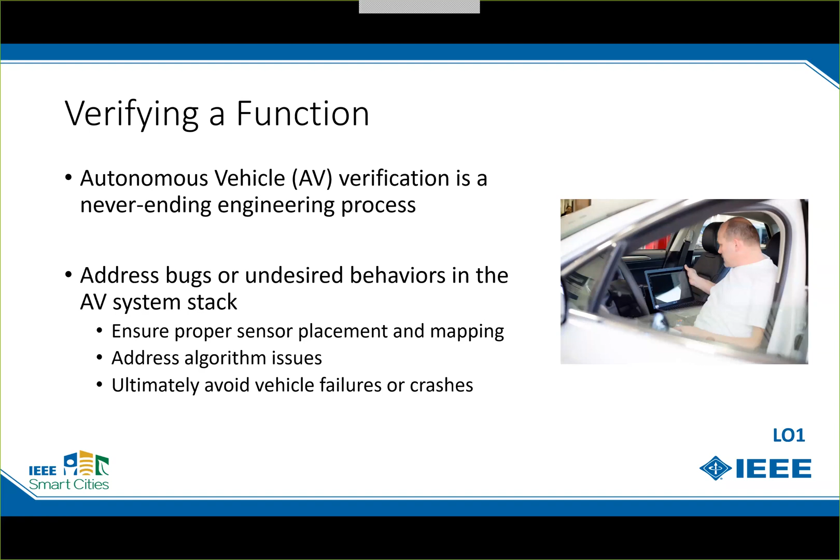And that's where simulation tools are so incredibly valuable, because it allows you, particularly if you're using any kind of modern software development processes, the term you'll sometimes hear is DevOps, it allows you to automate much of this regression testing. And in fact, you can automate a lot of the simulation testing required as you're developing code. Just another example to give you the kind of complexity that I'm talking about.

Let's think about this notion of what is known as a behavioral competency. So NHTSA, actually a group known as California PATH, doing some work for NHTSA, has identified 28 behavioral competencies. And then Waymo and some other folks have come up with an additional 19. So currently, roughly we have 47 of these things.

An example of a behavioral competency is the ability to do a high-speed merge. The autonomous vehicle can do a high-speed merge onto a freeway. That's something that any self-driving car has to be able to perform competently. If you think about that test case, so merging onto a freeway, and you assume that there might be, in my example, 8 relevant variables.

These variables could be things like traffic density on the expressway, traffic speeds, the color of vehicles, weather, things like that. And for each of those different variables, if you can imagine 5 possible values, simple math will show you that just with those, and I would suggest these are very conservative estimates, that'll give you 400,000 unique test cases to prove out this one competency.

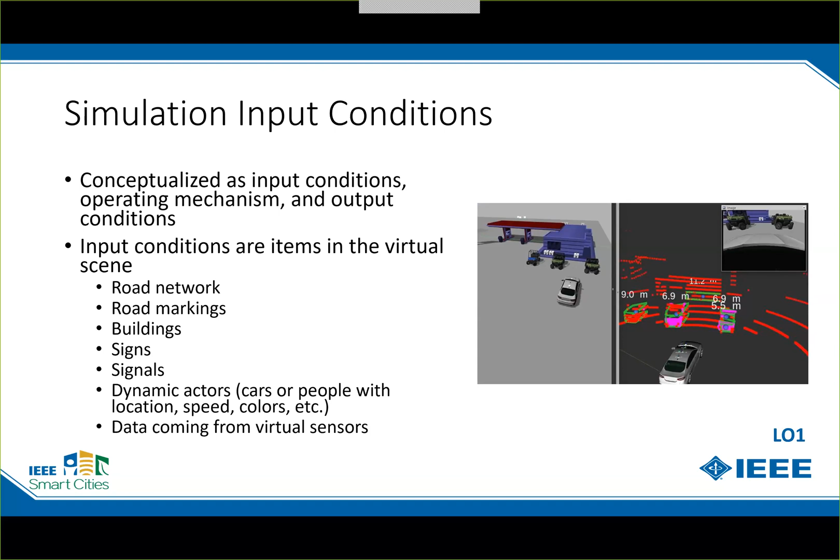I touched on this a bit, but input conditions for a simulation. These would be things like the physical road network, road markings, buildings, signs, all of those attributes that make up the scene. And I'm going to run a little movie to show you what's currently available in terms of simulating input conditions with one of the virtual testing tools that are out there.

So as you can see, you can vary the quality of road markings, whether the roads are wet or dry, traffic, types of vehicles, lighting, the color of vehicles, time of day, etc. This particular example that I'm showing you uses the Unity rendering engine, which is one of the two large gaming engines that are out there. But it's getting better as we continue on. It's getting more and more photorealistic in the ability to actually turn out a simulation that looks like the real world.

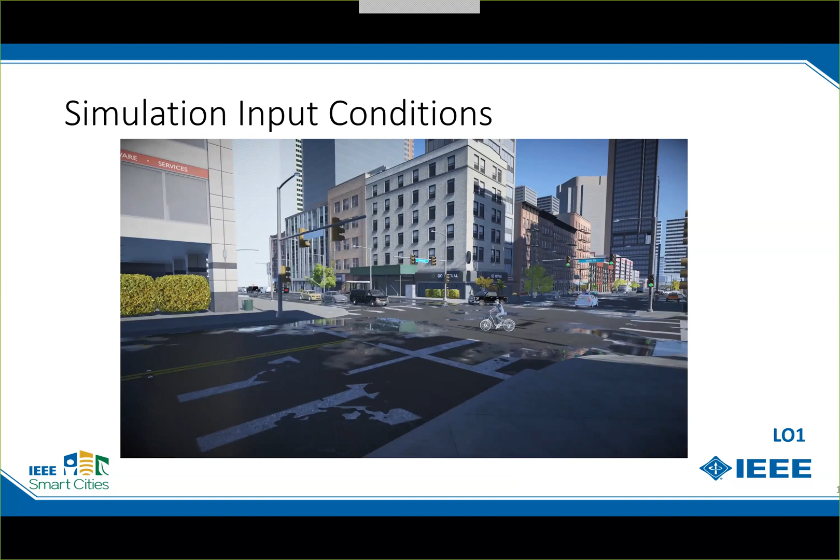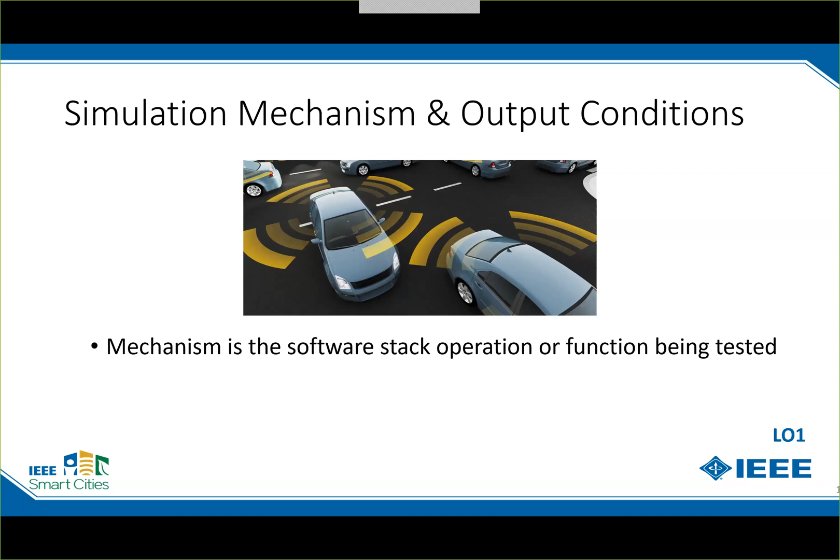Second thing that we want to look at in terms of simulation is the mechanism. This is the actual function or AV feature or piece of software that we're testing. And to give you an idea of the complexity of an autonomous vehicle software stack, this is a graphic that shows the Apollo 3.0 AV stack. Apollo is a product that originally came out of Baidu.

So this is an open source piece of software, and each of these small blue boxes that you see under the open software platform. So you'll see there's a piece that says localization, perception, planning, control. So, as an example, let's look at the perception box.

It looks like a very small piece of the overall stack, but that box by itself is all of the code required to take input from cameras or radar or LiDAR and convert that raw data into meaningful data in a manner analogous to, in the case of a camera, your eyesight. So it's taking image frames from the scene, fed to it by the camera, and it's actually deriving useful information from that scene. It's identifying cars and people and other objects in the scene as part of that perception function.

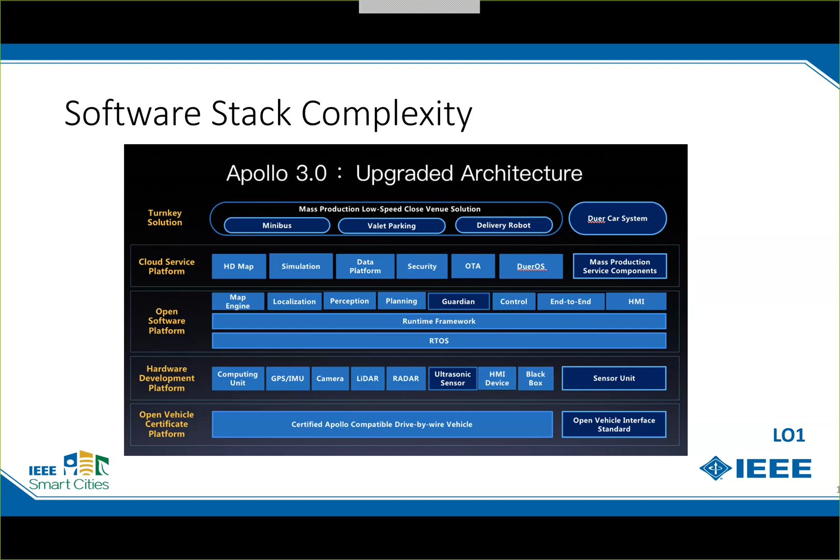So this is not a trivial piece of code, and it is not a trivial task to try to test this going forward. And the last piece of the simulation is we need to be able to simulate output conditions. By output conditions, I'm referring to control of the vehicle's longitudinal and lateral motion. So throttle, brake, steer, shift. We need to somehow, as we're running the simulation and we've made a control decision, send an output to our virtual vehicle to command it to turn left or turn right.

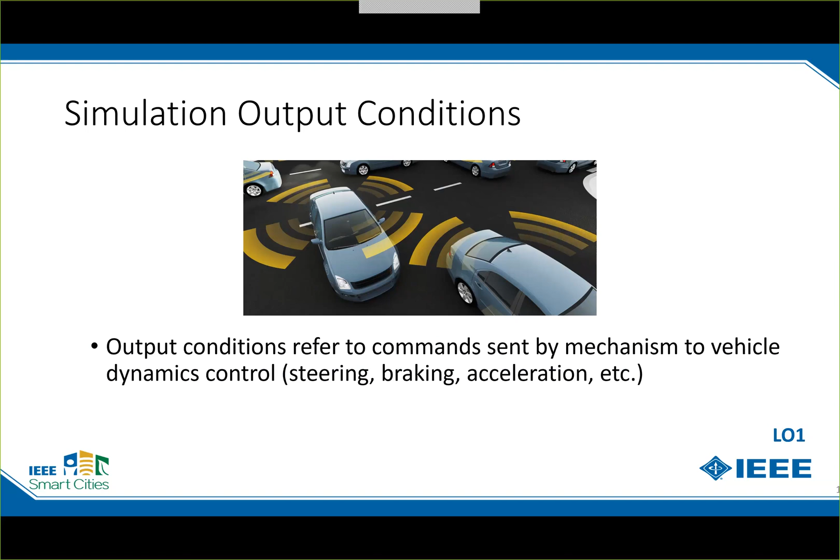Give you an example of that. This is a lane keep assist example. So this little movie that you're going to see uses a camera. It is perceiving the scene in front of it, and it's passing image frames at about 20 hertz, 20 times a second, to the perception stack. The perception stack is then identifying where are the lane markings in the image. Once it identifies the lane markings, some additional code compares the location of the lane markings to the current position of the vehicle.

And then in order to keep the vehicle centered in the lane, as it sees movement in the left or right direction, commands are sent to steer the vehicle left or right. So let me run this. You can see how this operates. So it's looking at the incoming data, and as we enter the curve, you'll see it will begin to command, in this case, a right steering angle at some degree to keep the car centered in the lane.

So even though it looks relatively simple, there's a lot going on in the background. And in order for this to actually work in a real car in the real world, all of those pieces that I mentioned, the input conditions and the output conditions, all of those have to have very good correspondence with how the real physical world operates.

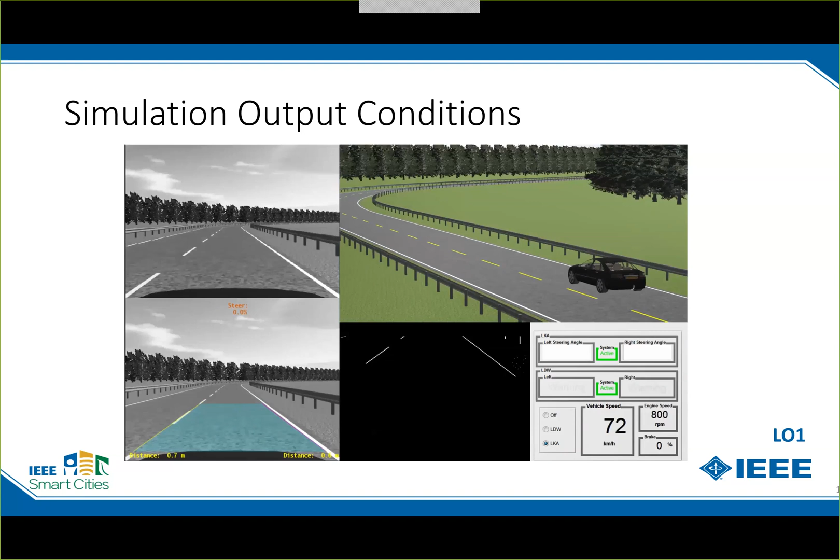So one other thing that I want to touch on with respect to simulation and why it's useful and why we want to use it is if you think about behavioral competencies and the many millions of tests that you need to run, that is a very expensive proposition. Simulation would hopefully allow us to narrow down the funnel of the actual physical tests that we need to run. And it will allow us to do lots of testing in a very short period of time compared with running actual physical tests.

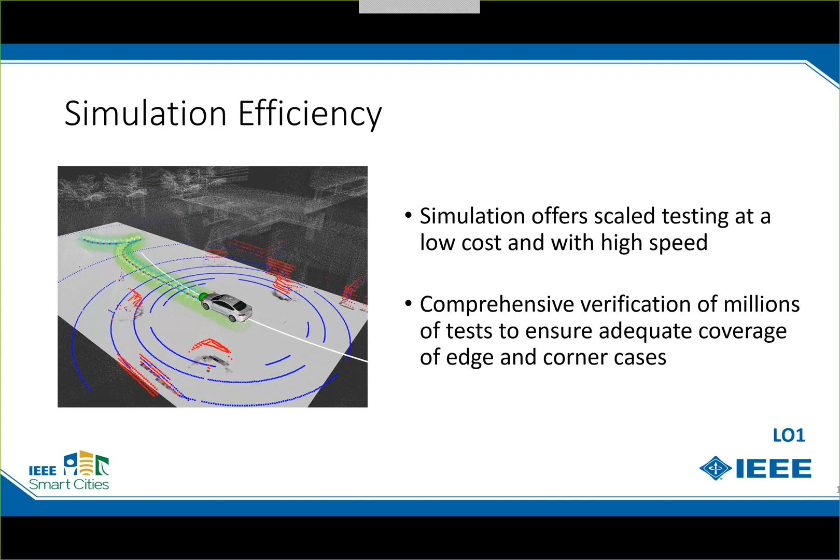Let me now show you an example of sort of how this works, and then I want to talk about two approaches to simulation. One is a workstation-based approach, and one is cloud-based. So this is a workstation-based example. In this example, again, the perception stack is attempting to determine is there something in front of us? Do we need to apply the brakes? You'll see in the upper left a graphic representing a simulated radar, and then on the right-hand top is the image frames coming in.

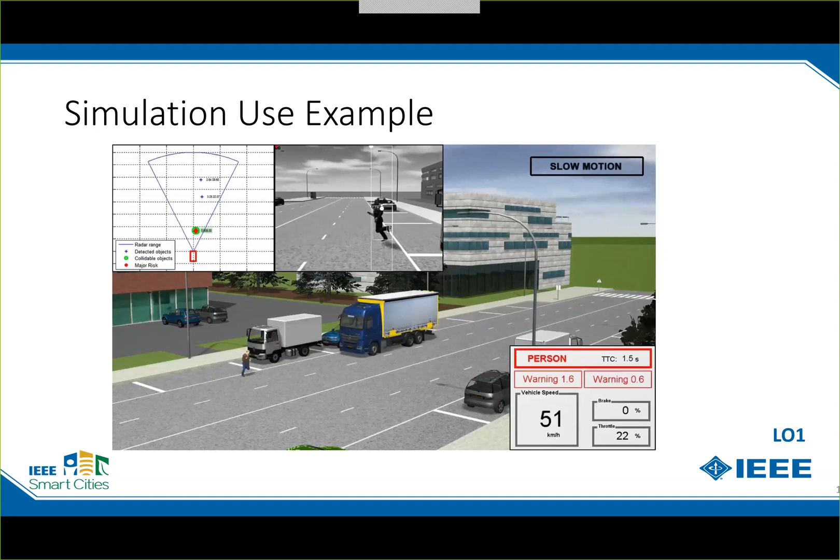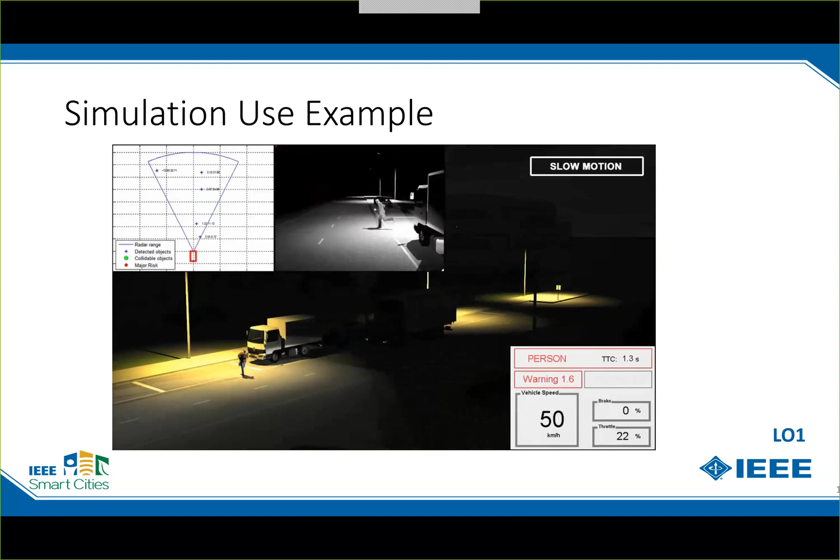And as I run this, the gentleman's running out in front of the oncoming truck. We perceive that he's there. We try to apply the brakes. In this case, it appears we may have hit our virtual individual, but the idea is to slow down and ideally not hit the person. Same situation, there's lighting above where the person emerges into the lane. In this instance, we've eliminated the lighting, so we've changed one of the variables.

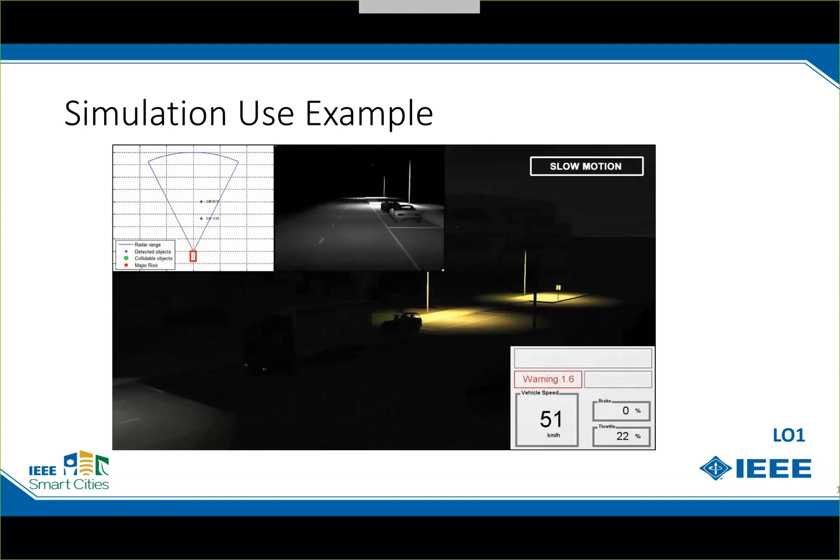And you'll notice in a workstation-based approach, these all run serially. So we run test 1, then test 2, then test 3, then test 4, changing different variables from run to run. So here's rain, fog, snow, etc. So this is an example of how, in this particular instance, you're checking your perception stack and your controls in this one given scene, and you want to run all these different variations.

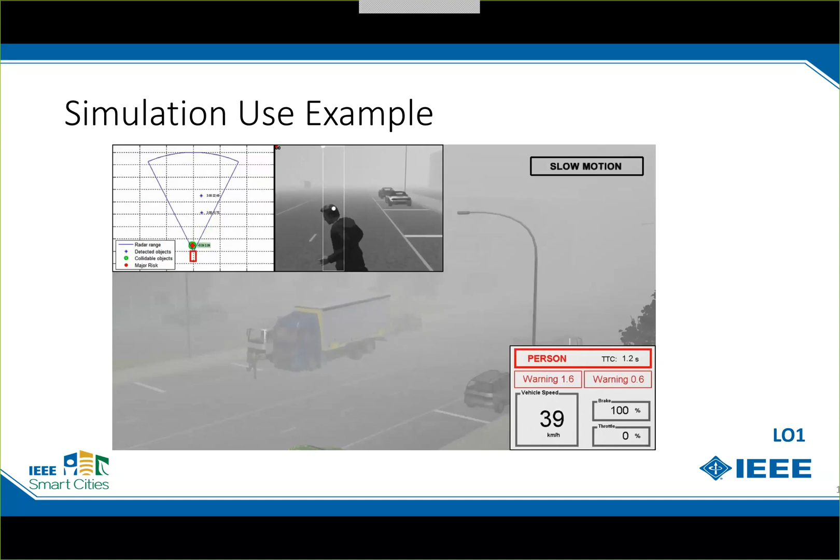And as I said, you can do this if it's a workstation-based simulation tool. You're going to do this serially. If it's a cloud-based tool, each of these different tests that you've seen can all be queued up and can be run simultaneously. So if you've seen anything about Waymo and their CarCraft tool and how they're doing simulation testing, this is what folks like Waymo are doing.

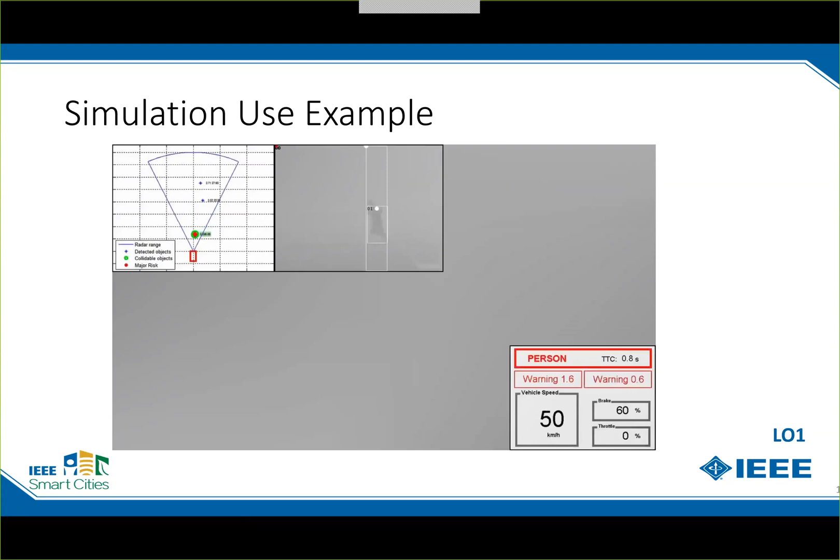They're running millions of test instances overnight, and they're doing that on a continuing, ongoing basis over and over. This gives them tremendous ability to cover many edge cases, many combinations, and they can begin attacking that problem of, for instance, if we use behavioral competencies, the 400 million tests that we need to run. So that gives you an idea of why simulation is so extremely valuable.

But now I want to touch on some limitations when it comes to using simulation. The thing that you have to consider here is that simulation is only useful if you have what I'll term good correspondence with the real world. So essentially what we're saying is the mathematical models that are used to model the sensors must in fact behave in a manner similar to the way the real sensors work in the real world.

The virtual scene that's been built, the material properties, the specular versus matte surfaces, whether something is metal or plastic or paper. All of that information has to be incorporated into the simulation to ensure that we're not running a simulation that is essentially useless because it doesn't reflect the real results we're going to get when we go and run the vehicle in the real world. Let me touch particularly on sensor models.

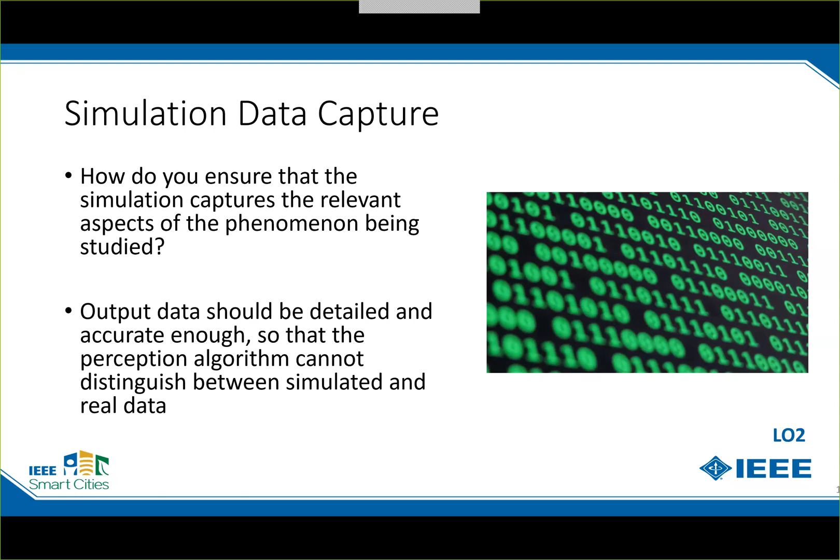So as I mentioned, I'm a founder of one of the simulation companies. And the difficulty that all of the simulation companies have is that they're relying usually on published research coming out of the universities in terms of guidance in how to build the sensor model. Their expertise typically is in graphics and 3D modeling capabilities. They don't usually have access to physical laboratories or test vehicles. And in many cases, they don't even have the actual sensors themselves.

And this can result in models being built that, since they don't have good correspondence with the way the actual sensor works in the real world, can give you false or misleading results when the simulations are run. Sensor models typically are built in 3 forms. So the first would be what I call a non-realistic perfect model. So if this is a radar, essentially what this perfect model will tell you is that there is a target in front of the vehicle at some range or some distance from the vehicle.

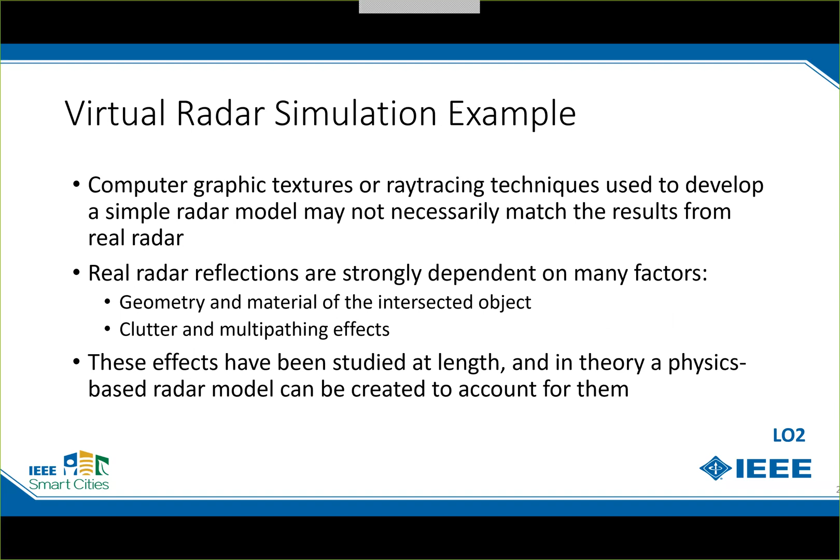Give you an example. If we're modeling a radar and we have this situation, the pedestrian that you see in front of the vehicle, typically you don't get much return in the real world from a real radar. You wouldn't know that a person is standing there. But we understand that, and even with simple models, this is relatively easy to model. If we make it a bit more complex, so we have another vehicle in front of that person, then you'll see the white van, but you will see, again, the person in between the 2 cars.

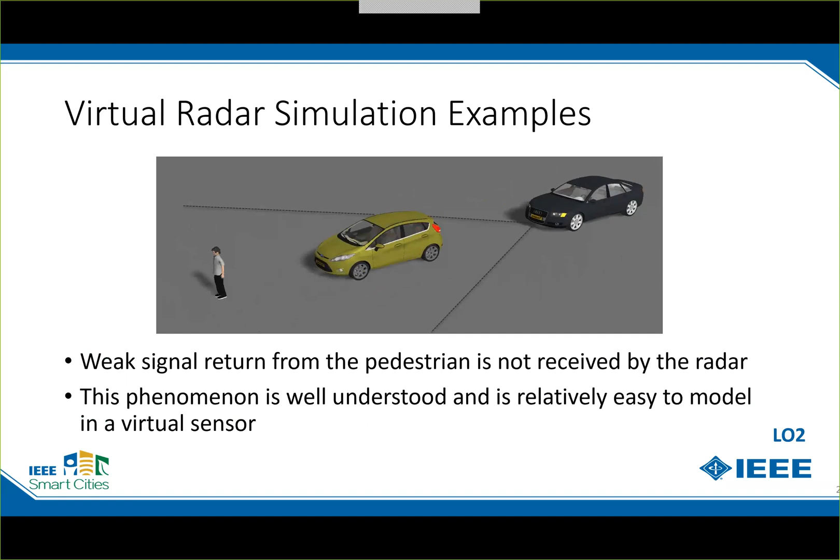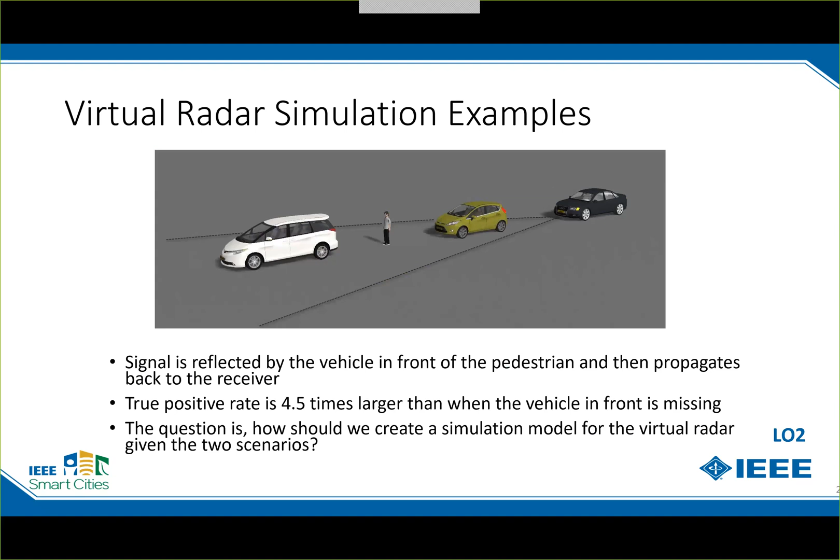The question becomes, how do we model this relatively straightforward, simple condition, as well as this more complicated condition in a virtual radar given these two different scenarios? And that's the challenge that the simulation companies are facing. Like I said, the way this is generally approached in the better quality models is to use what's known as a probabilistic sensor model. This is how that works.

So in this case, you'll see on the top two cars that are converging on each other. And the blue sort of cone, that's the radar beam of the car looking at the car approaching it. As I start this, the top left black box that you see, that's charting the actual range between those two vehicles. And I apologize that the legends are really too small to see, but it's in meters.

The bottom chart that you see with all the different colors, that's the actual range, and on top of it is superimposed this probabilistic noise model. So the bottom is what we would pass to the perception algorithm, and we would force it to process that data to derive a correct range. And then on the right, you'll see these little circles. Those represent clutter. So that's the noise that the radar is picking up as the simulation runs. This is currently, for simulation sensor modeling, pretty much state of the art.

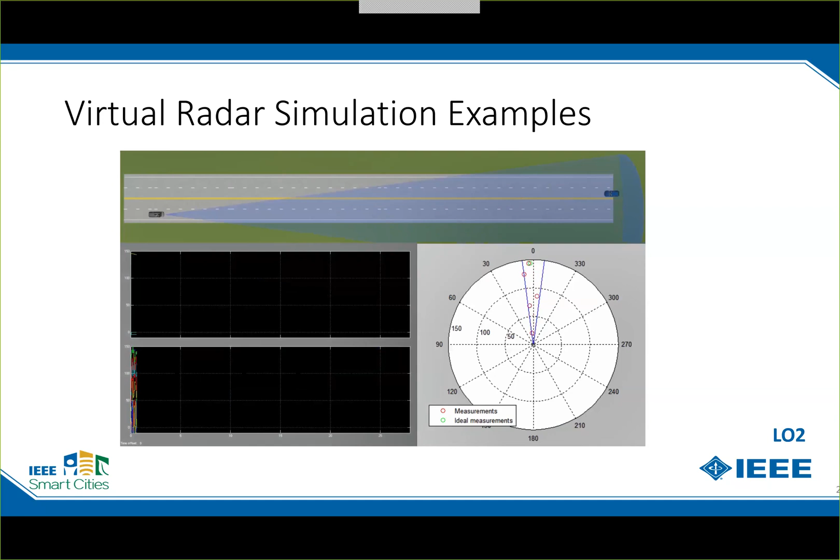I'll show you one other example that's a bit more complicated. This is again a radar example, and this is showing you what's known as range Doppler output data. So this is taking a simulated raw radar data model and processing it, and what you see on the right-hand side is what a radar engineer would expect to see in terms of processed data. So as I run this, you see the scene in front of us, and on the right-hand side, you have to imagine we're looking down on top of our car. And you'll notice the speed, there's a line at 15 meters a second. That's how fast we're moving.

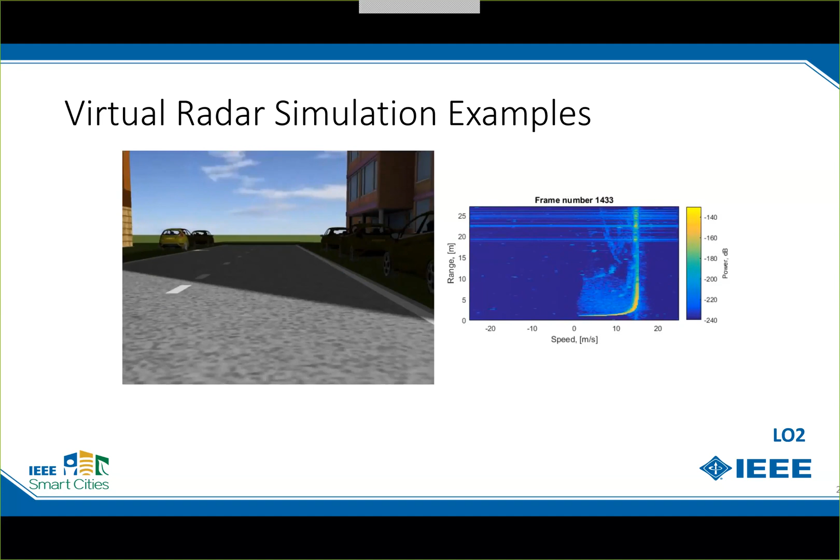As we come up and approach this building, we're going to be turning left. And you see these cars coming past us. That's the bright yellow that just went past us. As we turn, you'll see a very sharp V form. That will be the edge of the building in the return that we're getting off of both sides of the building as we go through the turn. It's right there. And even though it may appear to be somewhat cryptic and noisy, this is considered to be processed radar data. So this is what a radar engineer would expect to see looking at processed radar signals coming in.

So there's one simulation company out there that's capable of doing this. I want to try and stay non-commercial, so I don't really want to say company names, but contact me after the fact, and I can tell you who to go see if you have a need for this in your company.

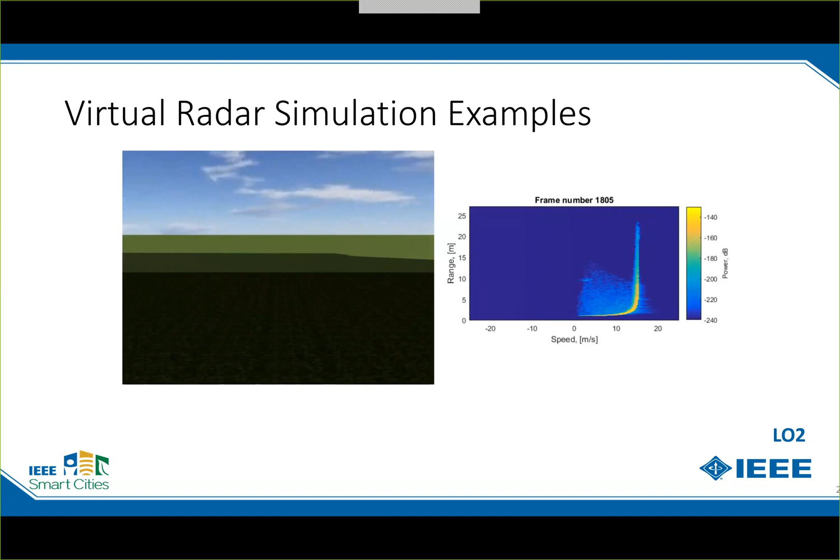Next, I want to talk about how to combine ByWire enabled vehicles and use them as a mechanism to check and validate your simulation results. So, by a ByWire vehicle, what I'm actually talking about is a vehicle that has been modified so that we can control both longitudinal and lateral control. So we have control of the throttle, brake, steering, and shifting. And we can control this via electrical signals or through sending messages over the CAN bus. So this is a car that has been converted and can be driven by a computer.

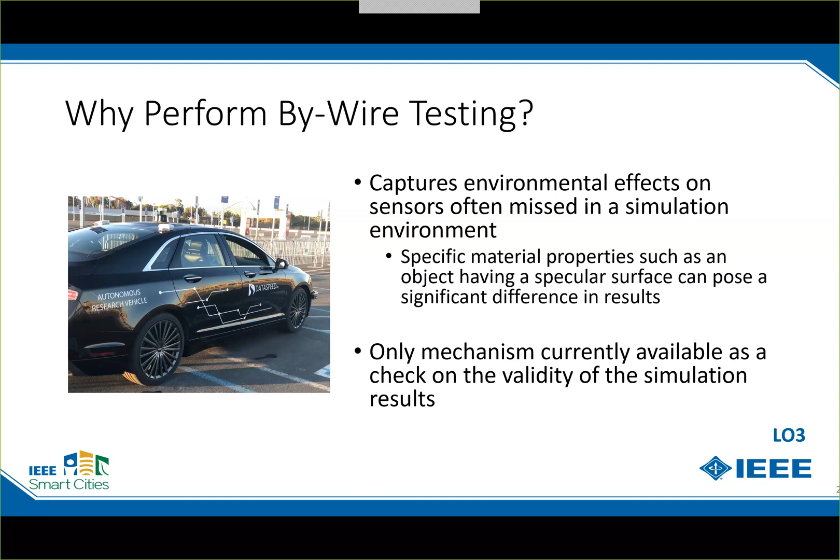The reason that you would want to combine By-Wire or real vehicle testing with simulation is that presently this is really the only mechanism that's available to do a check on the validity of the simulation results. You might think that you could do this kind of checking using human drivers, and I would suggest to you that human drivers are not repeatable enough in terms of time and position accuracy to be used as the controlling mechanism as compared to a By-Wire car. So with a By-Wire vehicle, if we want to set up a test where we're on a test track and the car is driving some known path, we'll have recorded some GPS waypoints.

That car is capable of driving that same drive profile with respect to speed and position, so that the vehicle will be in the same relative position from test to test. So at the same time, it'll be in the same position, roughly within plus or minus 3 centimeters. That's very, very difficult, even for well-trained human test drivers, to be able to operate with that kind of

repeatability. But it's this kind of testing that you then compare against an equivalent virtual simulation. So you have the results from the physical test compared against the virtual simulation to establish how good your correspondence is between the real and virtual worlds.

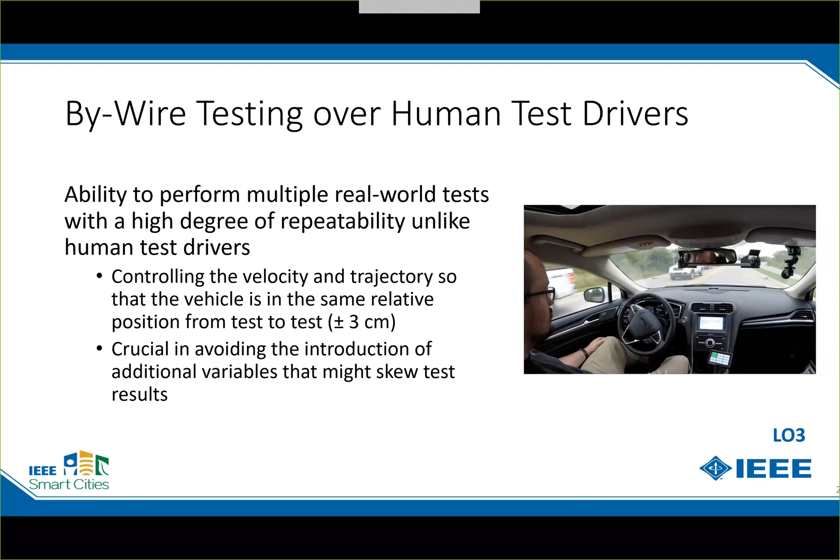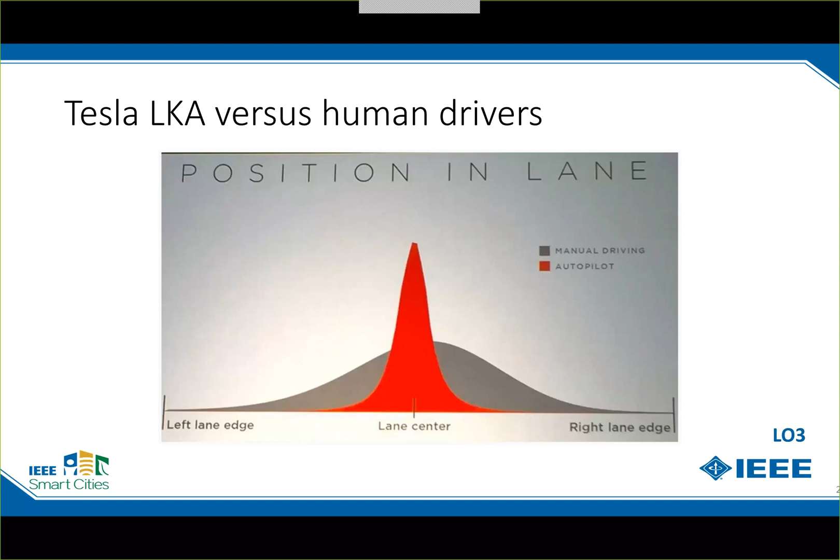By the way, this is data from vehicles where it's normal to drive in the right-hand lane, not in the UK in the left-hand lane. The red distribution shows where the vehicle is positioned and how much variability there is when autopilot is driving the car under LKA. So as I said earlier, although humans are very good drivers, I think we sometimes underestimate how good humans are in driving. They can't drive with the same kind of repeatability and accuracy that a By-Wire vehicle is capable of driving.

Lastly, I want to talk about just a couple things in terms of cautions in correlating testing results and making sure that what you're getting from your simulation tests are going to be useful and in fact will reflect what you can expect in the real world. I would caution that you be very careful when you're looking at real world against your virtual results.

There are a lot of variables that you have to take in mind that can complicate what appear to be an otherwise straightforward comparison. So, for instance, if you think about buildings in your virtual scene, whether those buildings have material properties attached to them that indicate that it's a specular surface versus a diffuse surface. A specular, I'm talking about shiny. Diffuse would be a brick wall. That's very important depending on the type of sensor you're using. LiDAR in particular comes to mind. Whether the material is wet versus dry can make a difference.

You need to look at sensor variability in terms of noise, signal fade with distance, multipathing. Are there multiple sensors in a scene where you might experience crosstalk? Have you taken into effect signal attenuation based on weather effects? An example of this would be using a LiDAR in clear weather versus using a LiDAR in rain, and then versus in fog. When you try to use a LiDAR in fog, the small suspended droplets of water in the atmosphere do an excellent job of attenuating the signal.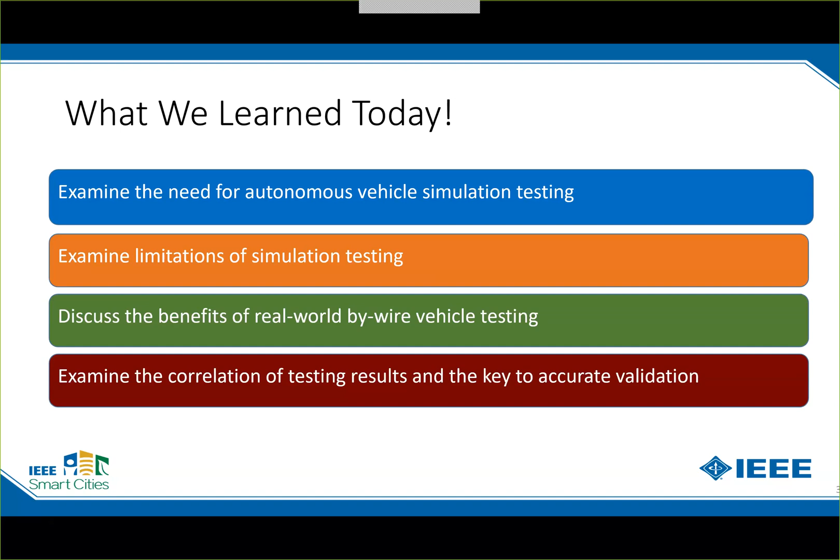Well, I'll take a stab at a question. Jeff, do your simulation and testing efforts apply just to suppliers, or is it application dependent? I'm thinking through the scenario where we have a number of vendors that are autonomous shuttle providers that limit the interaction to maybe a 3-mile loop or a geofenced area that may not take in all potential conflict scenarios. Yeah, understand.

So, for example, I'll give a shout out, even though I didn't go there, to the University of Michigan. They were running, I believe may still be running, an automated shuttle on their North Campus. It is geofenced. It runs the same loop over and over and over. And it's relatively low speed. It essentially shuttles people from parking areas down to the main engineering complex.